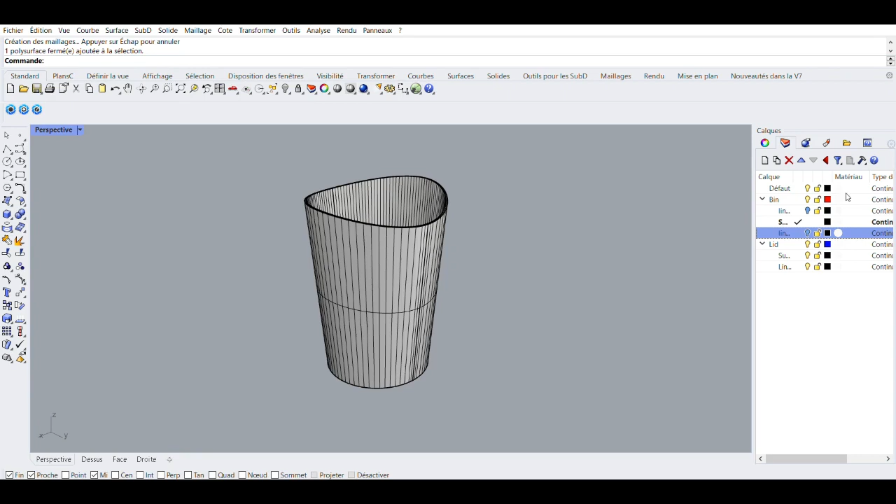Welcome to part 2. In this video, we're going to model the Happy Bin lid. So we're going to hide away the surface, the object, and we're going to use the Pringle line. We're going to copy and paste it to the line base of the lid layer. There we go.

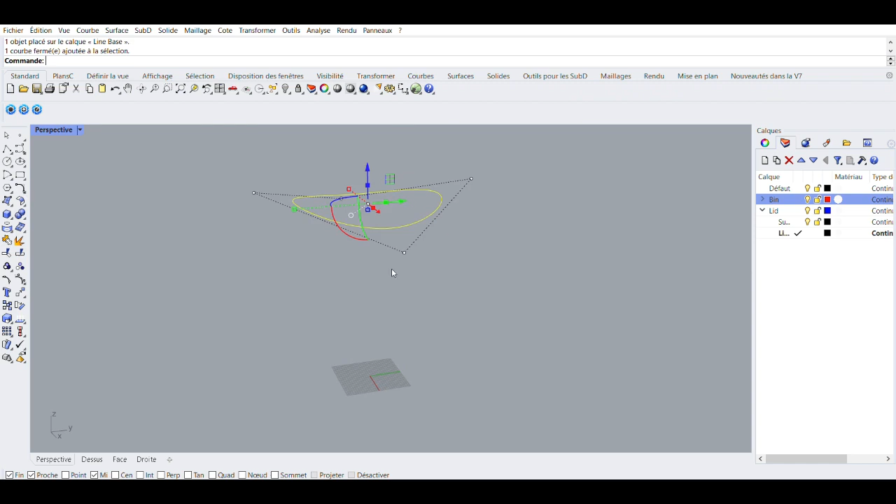We don't have dimensions for the lid, so we're just gonna guess. I imagine that it's about 5 centimeters, so we're gonna use 50 millimeters. We're gonna start the 5 centimeters at the highest point, so the highest dip, and so 50. There we go.

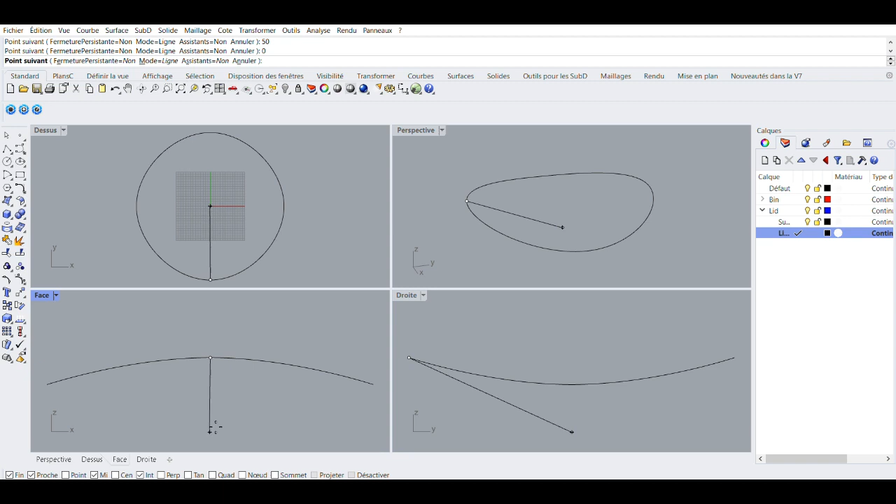Next, we're going to create the bottom circle so we can create a surface. And the bottom circle is going to be the same size as the Pringle. So the circle will have a radius of 150 millimeters. Next, we're going to join it to the rest of the structure. There we have it. That's the line base for our lid.

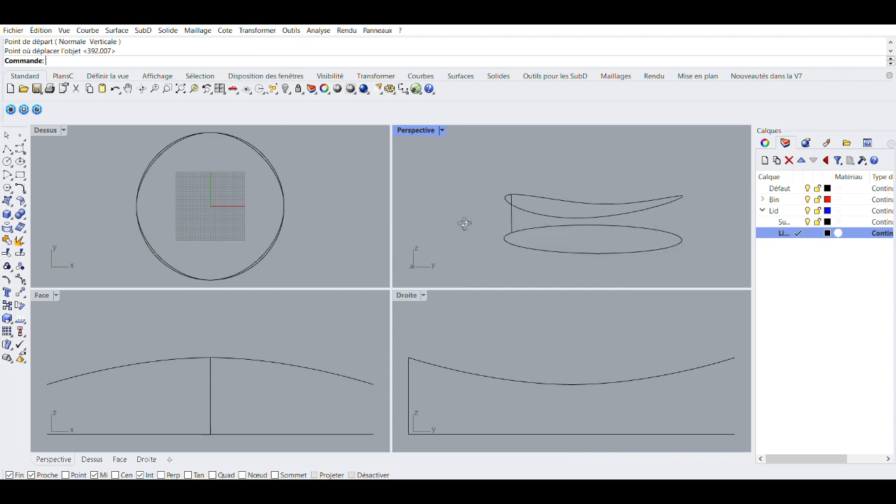We're now going to create the surface, so we're going to use sweep 2 again, select the 2 circles, select the line going through, and click enter. There we have it, we have our surface. We're going to put that in the surface layer, and we're going to continue with our line work.

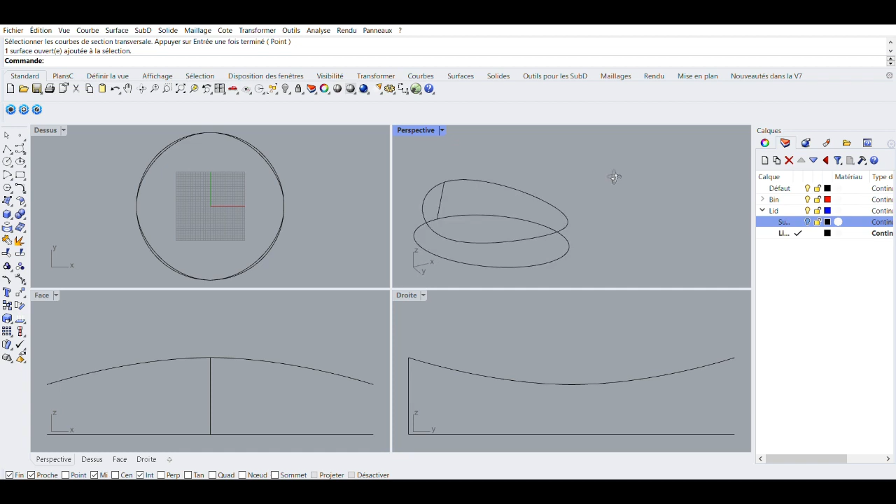So we're going to create the hole for the bin, approximate the size of the hole, so this is quite good. And we're going to put it actually quite low on the lid, because it's actually in a dip within the dip, so it's quite low. It's not at the same height.

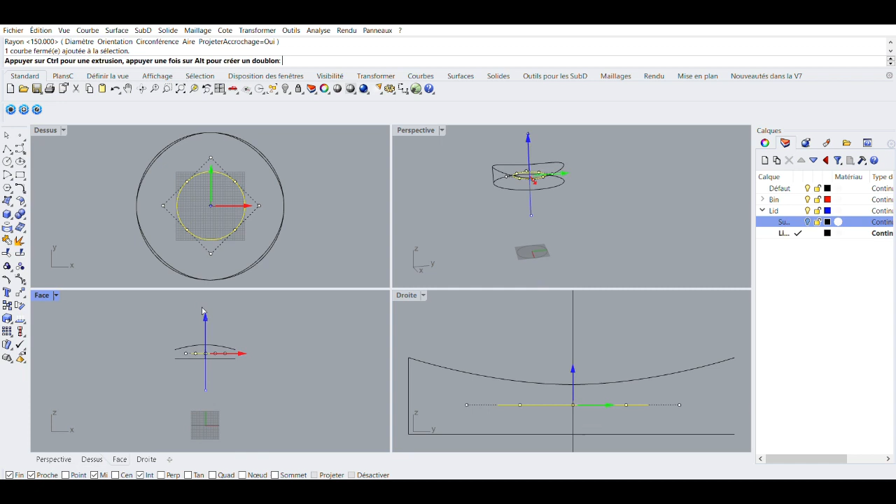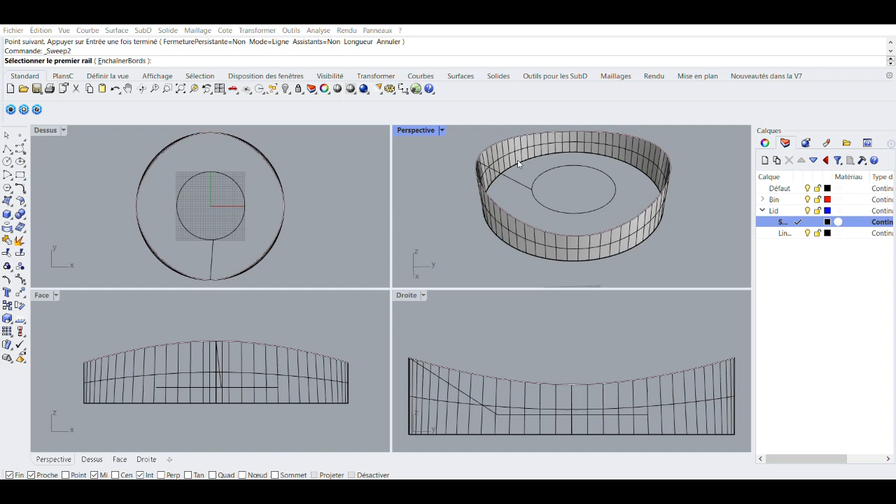And then we're going to create a link between the Pringle dip and the circle so we can create another surface. So let's turn our surface on, and we can do another sweep 2, select the Pringle and select the small circle as well as the linking line. And that's the surface for the top of the lid. Here's a rendered view, if you will, of the surface.

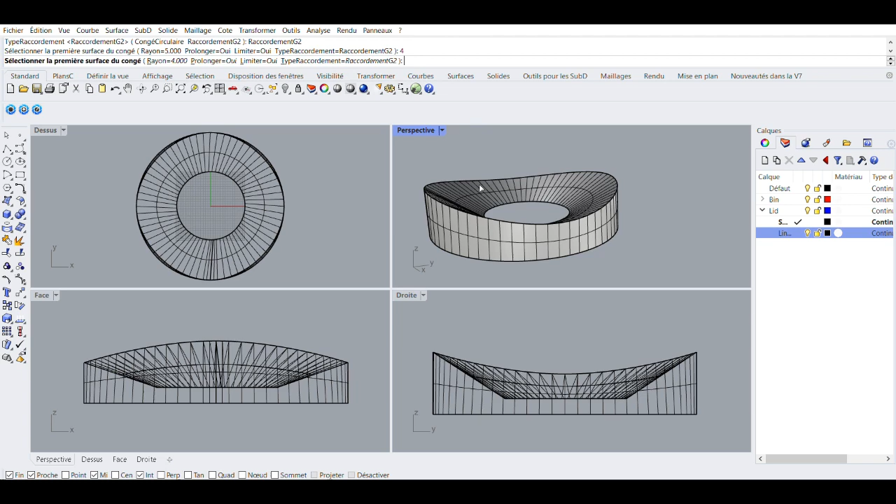Our edge is quite sharp right now. You could actually cut your finger on it. So what we're gonna do is use fillet edge and create a softer edge between the two shapes. So let's use about 5 millimeters, or maybe 4, you can decide. And there we go, a rounded edge.

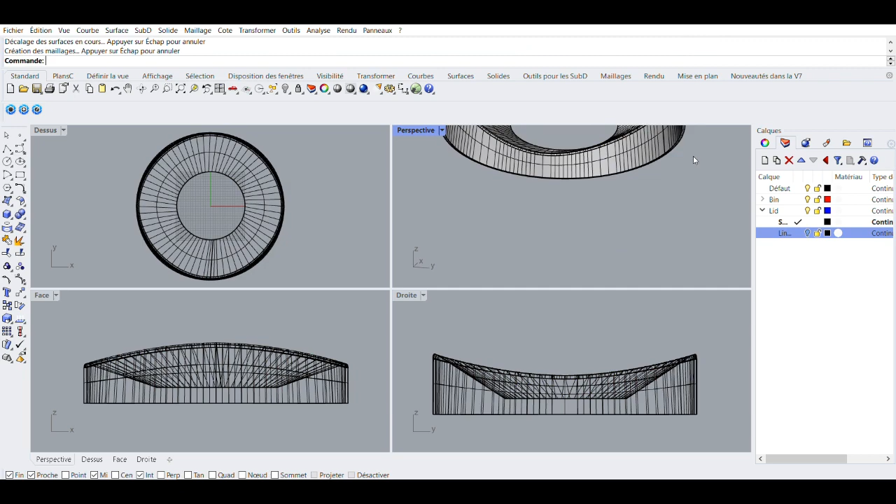That looks really good. Now we're going to use offset surface to create an object by doing it for each of the 3 surfaces. So we start with the bottom, and we're going to do a slightly smaller one than the bin, so like 2. And then we're going to do the same for the rounded edge. Offset surface. Make sure the arrows are pointed inwards. 3, and then click enter.

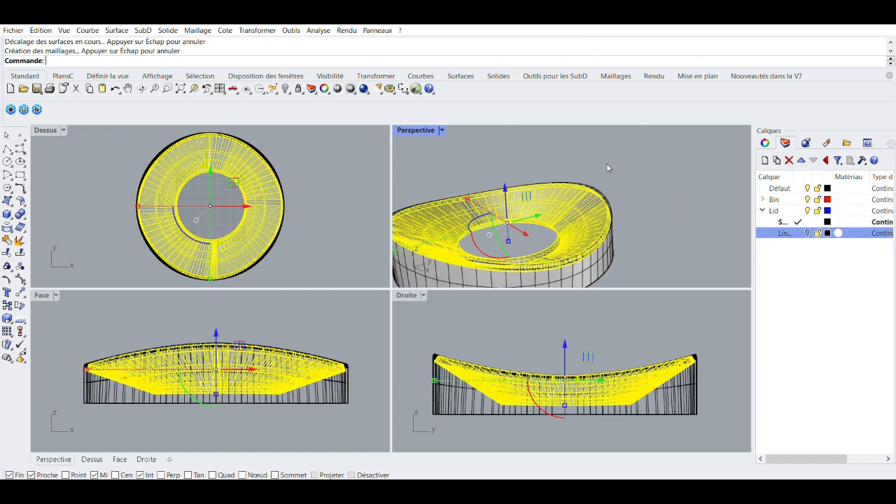Next is the top of the lid. So we're going to do the same thing, offset surface, and we're going to do a much thicker one. So we're going to use 8 millimeters. Maybe we can take a look at it in a rendered view. Let's do that. There we go. That looks pretty good. Oh, look at that beauty. It's thick.

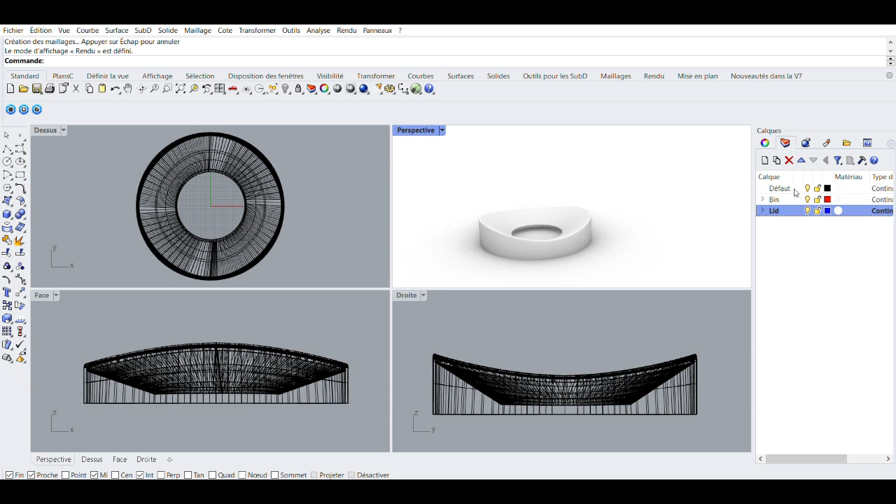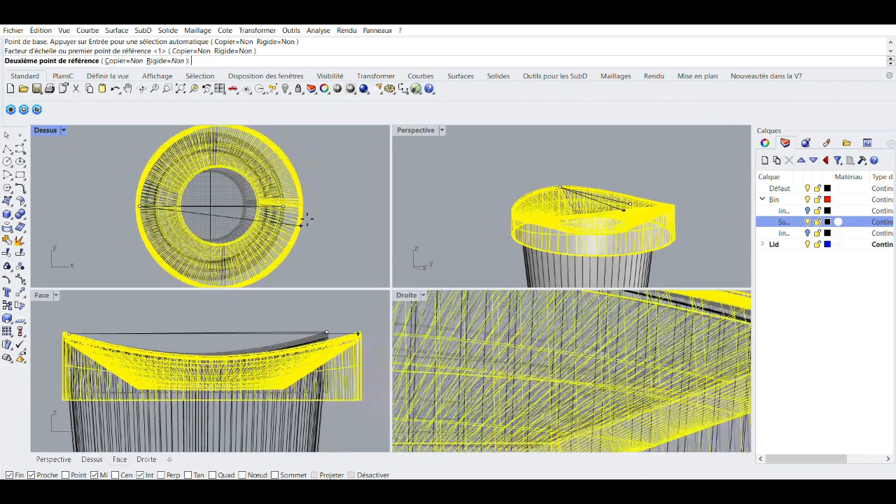Next, we're gonna try to put them together, right? So we're gonna turn on our bin, unhide our bin, whatever. We're gonna adjust everything. What we're gonna need to do as well is for the lid to fit on top of the bin, we're gonna have to get slightly bigger. So we're gonna use Scale 3D, and we're gonna just adjust it.

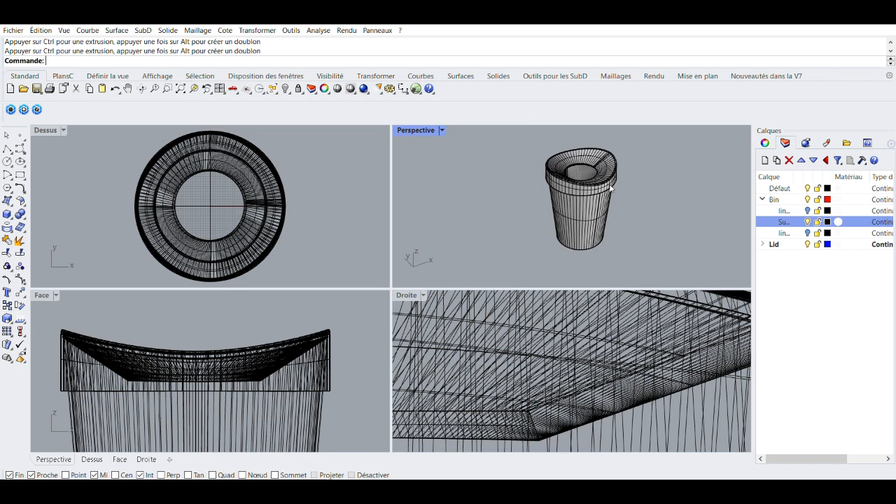Now you wanna adjust the position of the lid. And there we have it. There's the Happy Bin with our rounded edges, and looks perfect. Catalog, perfect. So I hope you guys enjoyed this tutorial.